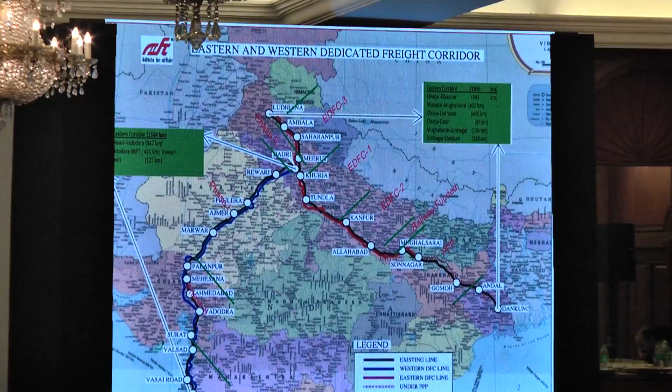And on the right side is the eastern corridor, which is extending from Ludhiana in the north, passing through Kanpur, Mughal Sarai, and right up to Sonnagar in Bihar. It is about 1,300 kilometers. So putting together both the corridors, the total is 2,800 kilometers.

It's a double line, fully electrified, with automatic signaling. It's a very modern kind of track. And we have provided all kinds of safety systems so that no hazard takes place in this system, and the traffic moves seamlessly in this system.

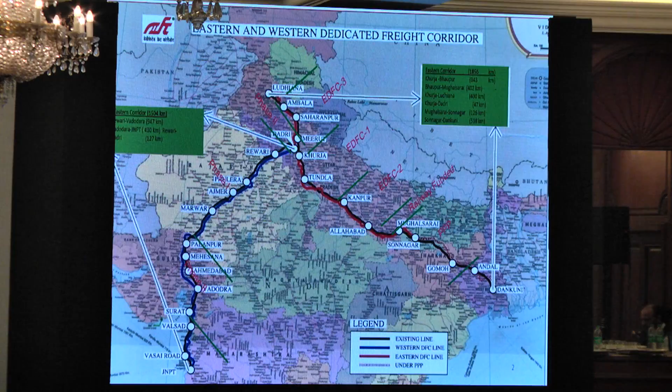See, these are just some highlights: the total corridor is about 2,800 kilometers. And these corridors are passing through 9 states in the country and through 62 districts. So it was a huge task to acquire the land, because the line is passing through Bihar, Uttar Pradesh, Haryana, Rajasthan, Maharashtra, Gujarat, so many states.

So it was a huge task to acquire about 10,000 hectares of land, costing about 20,000 crores. And the total earthwork involved is about 23 crore cubic meters. So you can just imagine, if you do this kind of mega project, how much harm you do to the environment. So what action we have taken, I'll further take you to that.

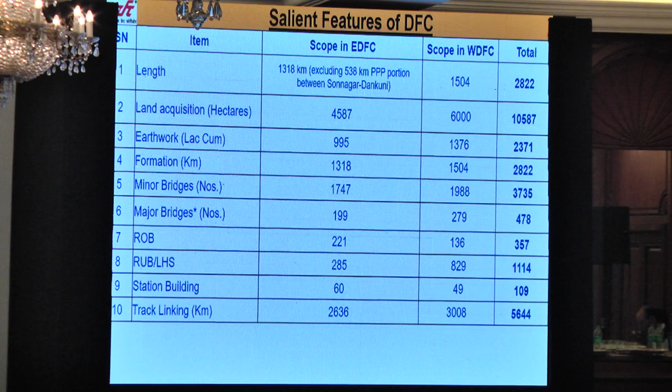And since there are so many rivers across the alignment, we are constructing about 4,000 bridges. Out of that, about 500 are major bridges on very major rivers in India. And besides that, total track linking of about 6,000 kilometers is involved.

Now, these are some special features of the project. On the left side, you can see the present Indian Railway rolling stock.

The standard rake at present on Indian Railway carries about 5,400 tons of load. Whereas on this dedicated freight corridor, when completed, it will use heavy haul and long haul trains, about 1,500 meters long, carrying 13,000 tons of load. The line capacity of these two corridors is about 120 trains each way.

So there is tremendous capacity created in these corridors, so that traffic moving by road, where there is so much congestion as everybody knows, some of that bulk traffic will shift to railways, and our highways will be free from that.

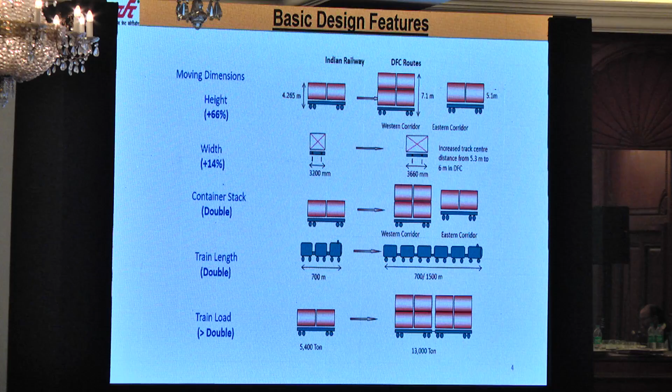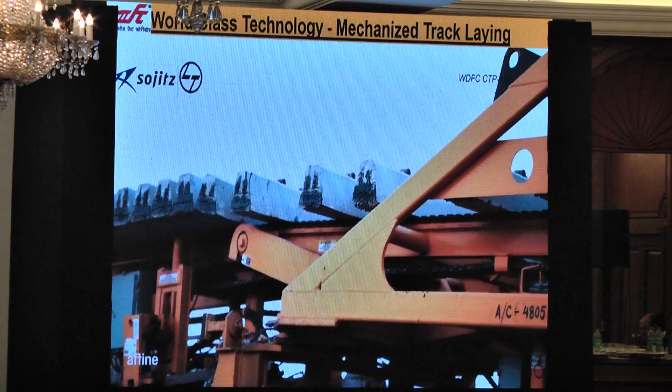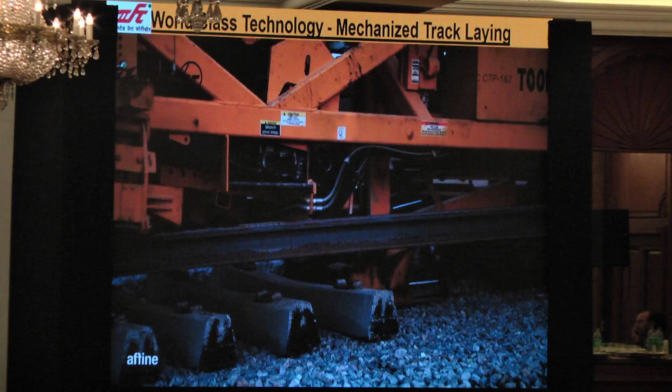I'll show you how we are doing the work. The entire work is being done by automatic machines. This is a new track construction machine handling pre-stressed concrete sleepers, each weighing 300 kg, and the rails are also laid mechanically. We have about 10 such machines, and every machine lays 1.5 kilometers of track every day, so we are linking almost 15 kilometers of track every day.

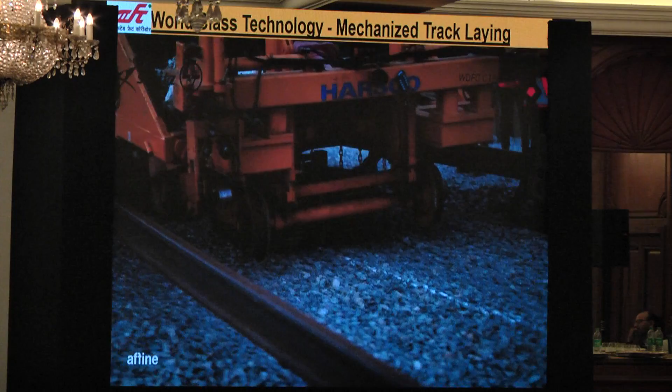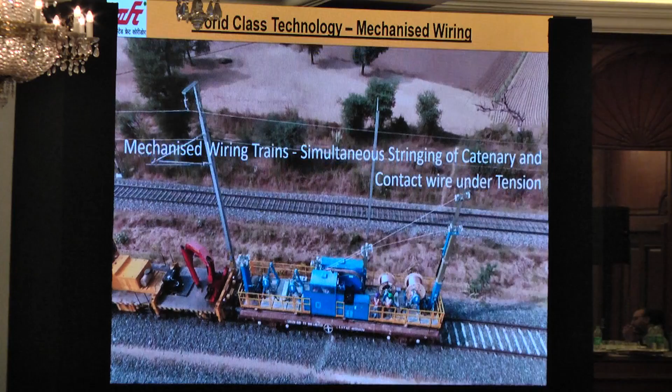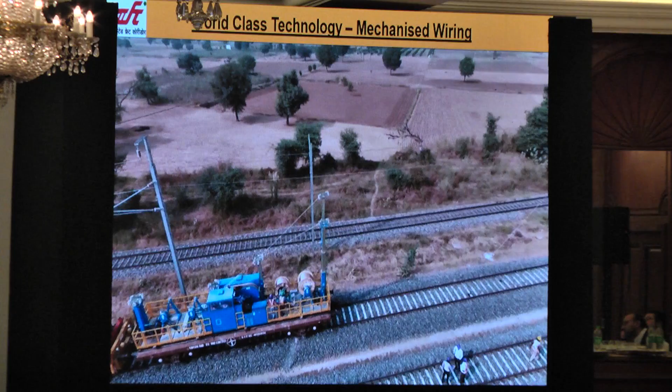There's another machine for this, because these are electrified lines, and a total of 6,000 kilometers of copper wire, like a rod over the track, is to be laid. This entire overhead electrification is done by these wiring trains. One such train itself can lay wire for a length of about 7 to 8 kilometers in a shift.

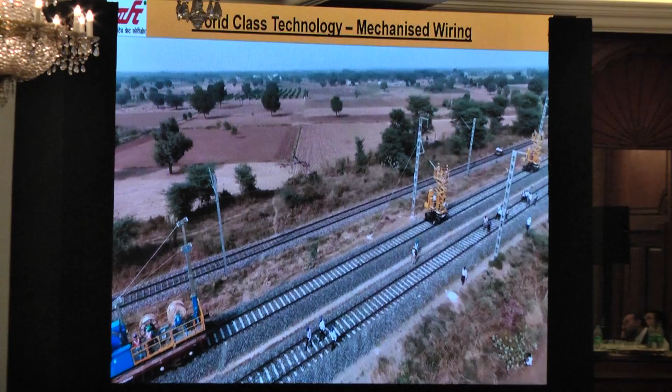Once we do such mega projects, it has a great impact on the environment. So whatever initiatives we have taken in this project, we'd like to share with you.

This is a study, I think by the Intergovernmental Panel on Climate Change, on temperature rise and global warming. On the y-axis is temperature, and on the x-axis is the year. You can see that up to year 1900, there was hardly a variation in temperature, just plus or minus 0.5 degrees centigrade.

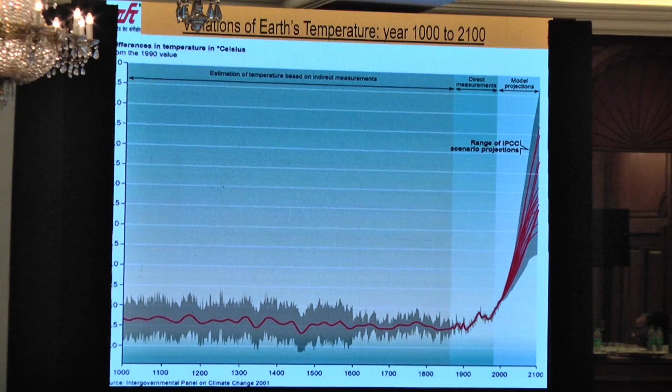But after 1900, because of global warming, by the year 2000, and there is an expectation that by the year 2100, global temperature will increase by 3 to 5 degrees centigrade. 3 degrees is a conservative estimate, and 5 degrees is a more extreme one. If we don't take any action to save the environment, this will be the increase in global temperature.

Whatever infrastructure projects we are doing, whether a railway project or road project, we have to take care of this temperature increase, because when we construct a project like this railway project, it will have a life of at least 100 years.

I remember one in the year 2001, on 26th January, there was a huge earthquake in Bhuj, you must be aware of that. It was 7.7 on the Richter scale, where the entire Bhuj was devastated and thousands of people died. I want to share this story because railway was the first one.

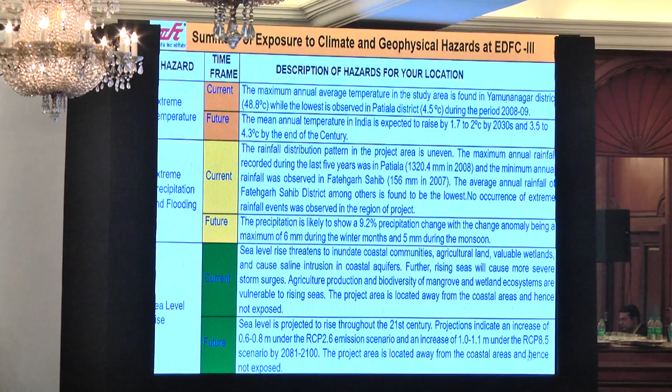Now, in order to take care of different hazards like extreme temperature, we analyzed how much temperature will increase in the next 100 years, and whatever instruments or systems we have provided, whether track, signaling, or communication systems, everything has been designed accordingly. We took good international practices, but had to make a lot of changes because of the temperature increase in our country. So we have designed our systems to take care of that increase in temperature.

Extreme precipitation and flooding — we have a lot of experience here because Indian Railway has about 60,000 bridges and a history of almost 100 years, so we know how to take care of those bridges. We have a very robust system of bridge inspection, and we study and inspect all the railway-affecting tanks on the upstream side so that no disasters take place.

Another factor is sea level. There is a study that sea level will increase in future from 0.6 to 0.8 meters. Fortunately, so far the dedicated freight corridors are not passing through any coastal area, so this particular aspect is not affecting us. Storms have also been taken care of during the study, in case any storm takes place.

I just want to give an example. In my earlier assignment, I was in charge of a project in Jammu and Kashmir, the Udhampur-Srinagar-Baramulla rail link, where there is a river Chenab, and we are constructing a steel bridge with a total of 30,000 metric tons of steel. This is going to be the highest railway arch bridge in the world, with a height of 359 meters — a huge bridge that will be a signature bridge in our country.

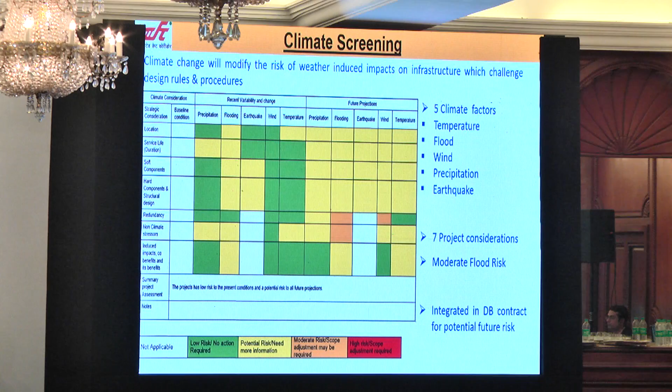This is just a comparison where there are 5 factors on the axis scale: precipitation, flooding, earthquake, wind, and temperature. On the left side, there is a table showing the recent variability and changes at present, and in future, a lot of factors change. The green color indicates low risk where no action is required, and yellow indicates potential risk needing more information. At present, some factors don't need action, but in future we have to take care of them. So while designing our project, that is the dedicated freight corridor project or major bridges, we take care of these factors for designing.

Now to take care of these factors in the dedicated freight corridor so that we can run our trains efficiently, in order to take care of fog - because in fog all the trains get delayed and there's a huge problem - we have gone for ETCS level 1 signaling system, because it's not a high speed, otherwise we would have gone for ETCS level 2. ETCS level 1 is sufficient because it has an automatic train protected warning system, where if the driver cannot see anything, he can still go at a speed of 100 kilometers per hour. And there is a system where if there is any problem in the track or the signal is not green, the brakes are automatically applied. So it is very safe.

As far as temperature variation is concerned, when we lay our track, we take care of the factor that during summers, the rail temperature goes as high as more than 50 degrees Celsius in India, and during winters, it goes below zero in the north area. So we have designed all our track to take care of this temperature variation.

In all our major bridges, we have provided sensors so that if there is any flooding in a major river, automatically the information comes into the operating control system so we can take corrective action. We have very close coordination with CWC, the Central Water Commission, for flood forecasting, and all flood risks have been assessed with action taken, because we have a good system in the railways where we keep all equipment and material ready before the rainy season. As soon as the monsoon comes, across Indian Railways we have a system where boulders are stacked somewhere, and emergency girders are kept loaded on wagons, so that if anything happens on any railway line, help is immediately extended. And there is a very robust warning system in place.

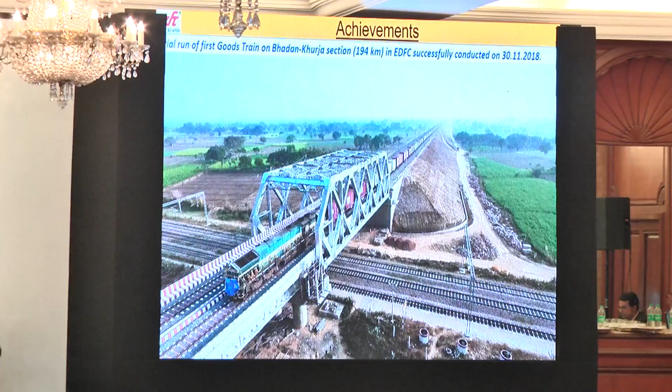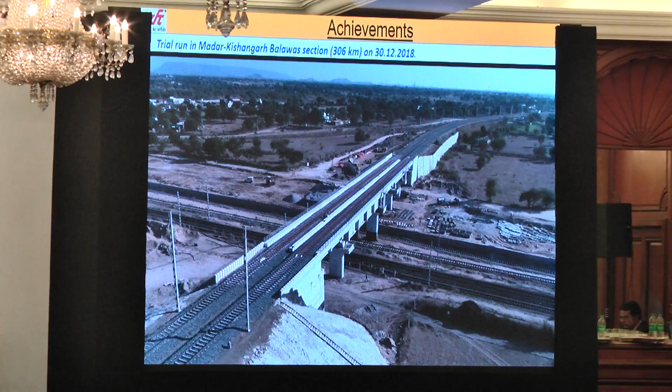There's another bridge where I think below is the expressway, and we are passing our railway line on top of it. These are our station buildings. These are operating control centers, because we will be handling a total of 2,800 kilometers of track on the eastern and western sector. So we have provided two operating control centers. One is in Allahabad and another is in Ahmedabad.

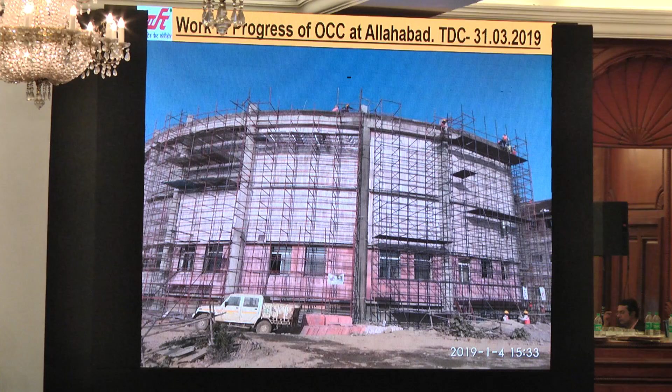All these are like war rooms where each and every piece of information about the train running or any emergency or disasters, everything will come here, so that the reaction time for attending any eventuality will be very, very less. This is another major river where we have constructed a bridge.

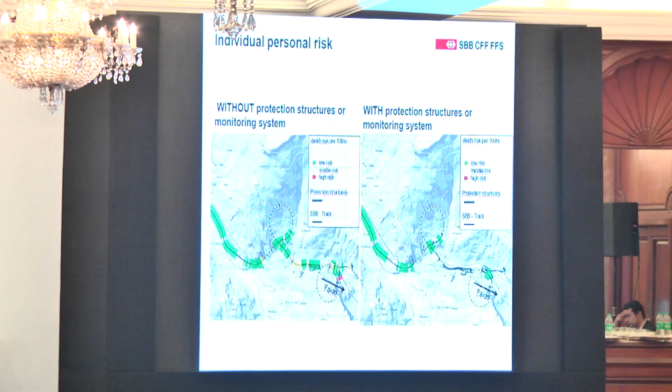And as a result, as you can see, there is a map where you can see, looking here at the individual risk, where we have high risk or low risk or what kind of risk we want to see. On the left side, we see it without protection structures and monitoring systems, and on the right side, we see the same map with protection structures and monitoring systems. And you can also see that there's no high risk anymore. So we know that our protection structures and monitoring systems work.

Then, next step, once we know where the risks are, we also have to say what is allowed to happen. And for this, we have these protection objectives. We're looking at the individual personal risk, the collective personal risk, and the availability risk. For the individual personal risk, we looked at the acceptable rate of casualty due to a hazard, which is 1 in 100,000. And this is 10 times higher than the average mortality risk in Switzerland. So it's like a statistical value.

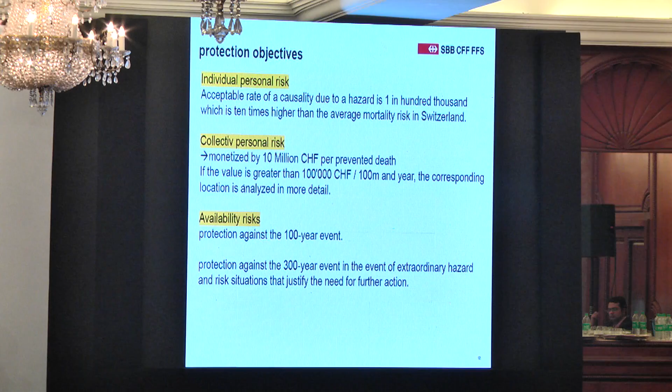And then for the collective personal risk, we monetize it at 10 million Swiss francs per prevented death. And once we have a section where the value is greater than 100,000 Swiss francs per 100 meters per year, we look a little bit closer at it and see if we can do something. And for availability risk, we protect actually everything against the 100-year event and sometimes even against the 300-year event.

Yeah, what should be done then? We have all kinds of protection structures and monitoring systems. We have large-scale ones with satellite and laser, as you could see in the morning, and small-scale ones like tele-jointmeters or cameras.

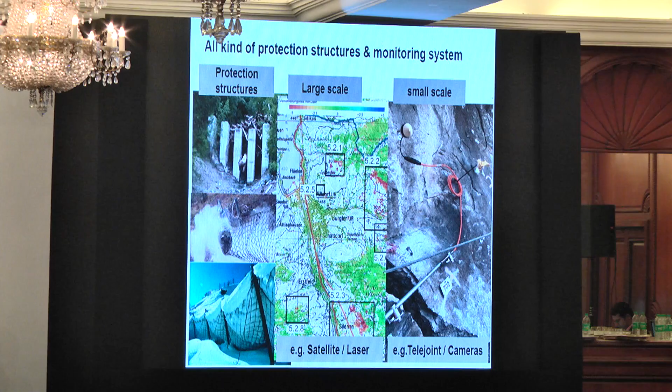But sometimes we say it's better to alert instead of building. So alert systems are often the more cost-effective solution than physical structures. And also, they protect against the very, very large and rare events, against which you almost cannot build anything. And we say it's a reduction of the risk of train collision by more than 90%. As this image shows here, we still have a net or something, but it's more like a carrier system for this alert system instead of a real protection structure.

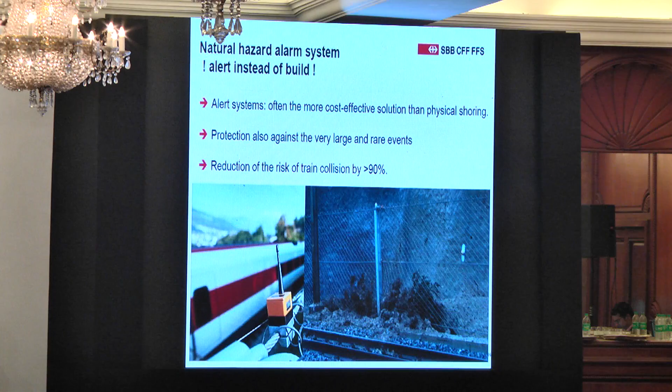Looking more in detail, what are the new challenges on the hazard side? Switzerland also has climate change, and there we have the greater extent. We have new scenarios. This is what I showed you before, something which did not really happen that much before. We have new places. We have change in annuality. We have a persistence of a hazard. So once it starts to rain, it just rains like a week instead of just 1-2 days. And it occurs in other than the typical seasons.

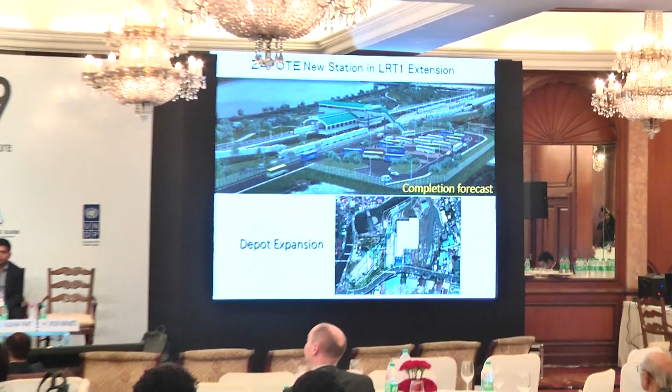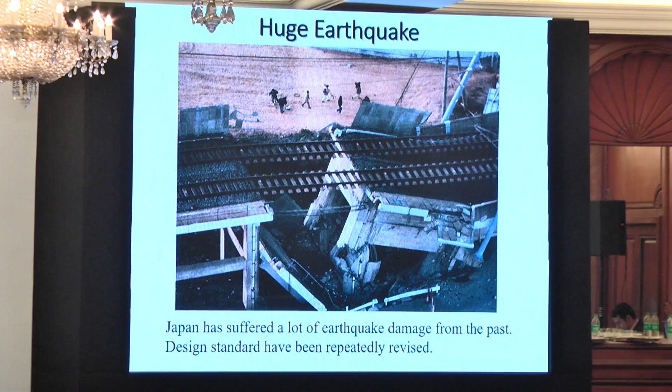Then a huge earthquake in the ocean caused a huge tsunami. Tracks along the ocean suffered catastrophic damage. Now the location of the new route has been moved to the hill.

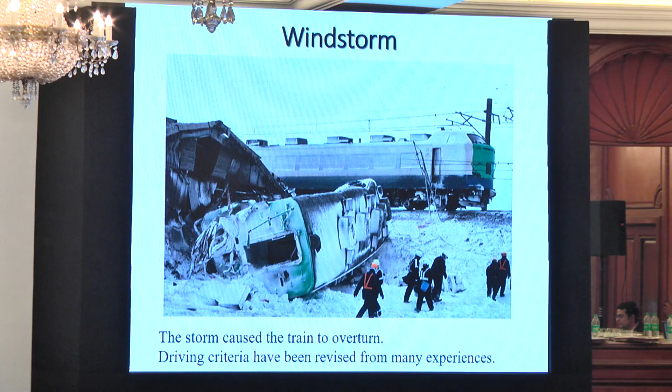Next, in Japan, we suffered every disaster. The storm caused the train to overturn. Driving criteria have been revised from much experience. Weak soil structure was damaged by heavy rainfall. The design standard for soil structure has been revised, of course. The embankment became stronger and stronger.

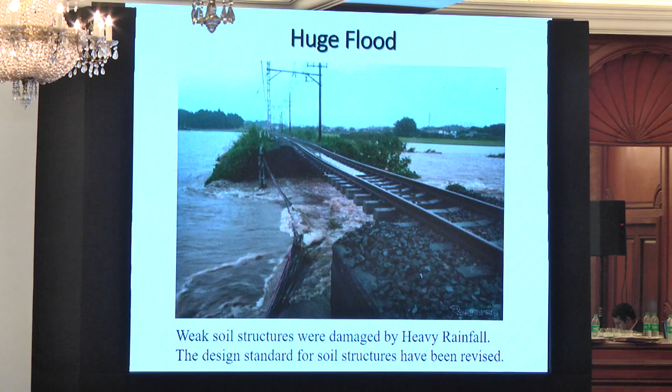Now I belong to the designing and planning team of JICA. There we are designing this railway we call the North-South Commuter Railway. The first stage, the center area, length around 37 kilometers. Design work is already finished. Bidding is now ongoing. Second stage, north extension, north side of Manila, length around 51 kilometers, and south extension, design ongoing.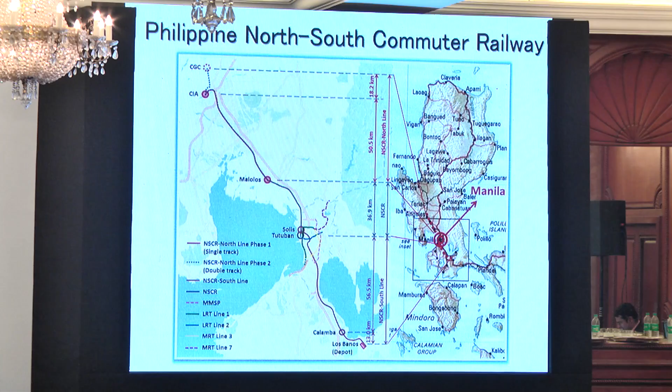Last week I went to and stayed in Manila for this project. The total length is 140 kilometers. Then we planned and proposed to the Philippine government the arrangement of weather monitoring sensors: seismometer, rain gauge, anemometer. The signals can be displayed on the facility monitoring console in the operation control center room, and at the same time recorded in the storage device.

We have a two-stage classification seismic design. We call it level 1 moderate earthquake and level 2 severe earthquake. Just a slight difference in design method. We use our design method to construct new railways in the Philippine project now.